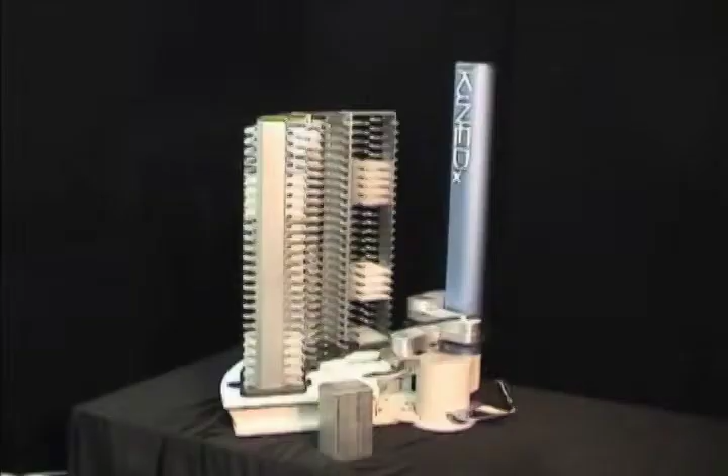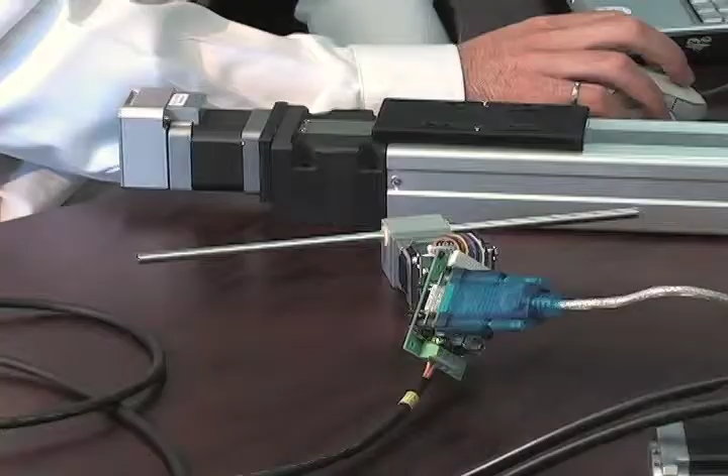What's happening with robotics is we've had a lot of sophisticated theories in the past, but not necessarily the technology to implement them. Now with the advent of faster processors, smaller electronics, better magnets even, we're able to achieve new kinds of motion, new kinds of force, new kinds of coordinated actions that in the past we weren't able to do.

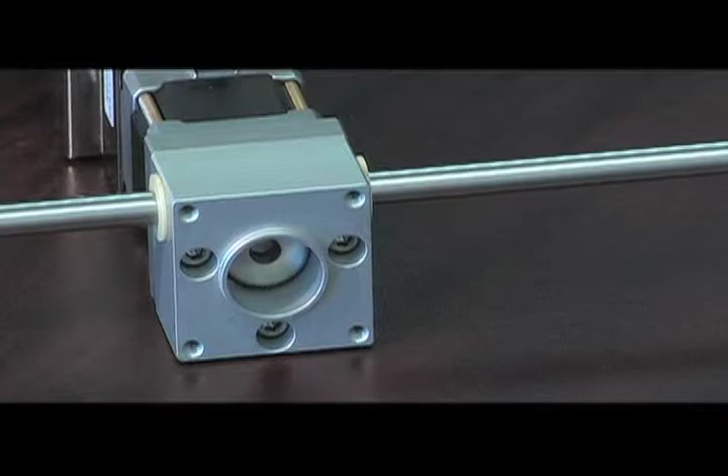So when we talk about advances in robotics, we are talking about being able to move things quicker, more smoothly, more quietly, and also be able to coordinate a bunch of motions together.

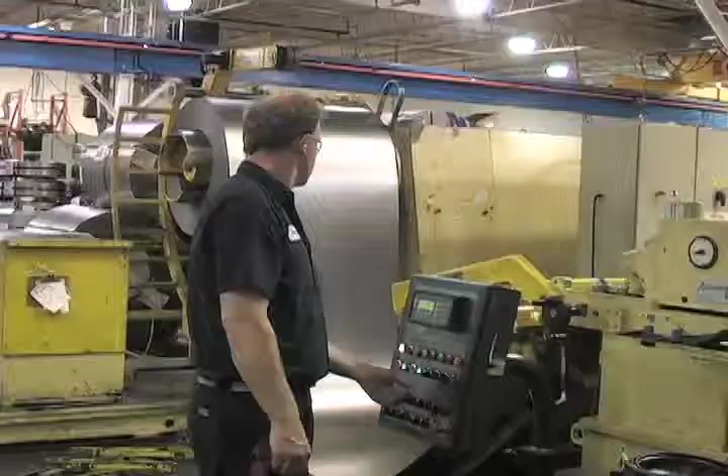Like many new technologies, there are some ethical issues associated with robotics. Some believe they'll take over the world and destroy us all. Others are more concerned that robotics are slowly replacing our workforce, putting people out of jobs.

Chris Murray from Myostat Motion Control talks about how robotics are used in the workplace.

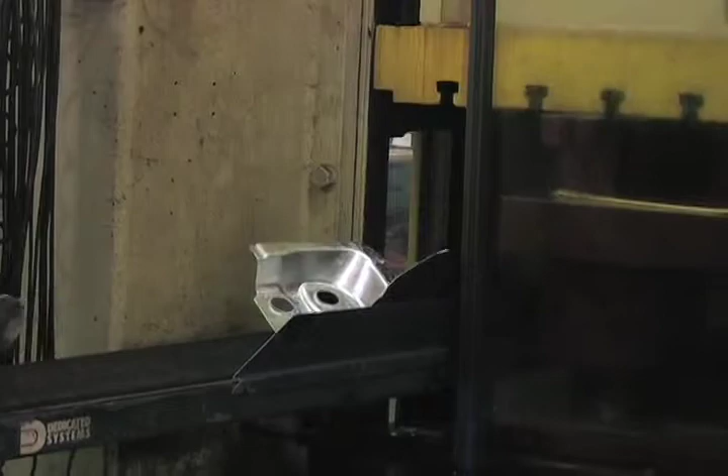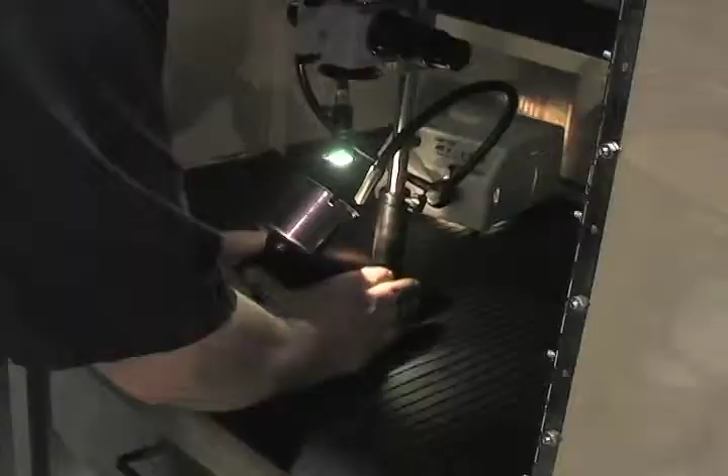The common misconception is that robotics and automation are displacing employees. But really what's happening is automation is allowing people to do things with much finer control, or it's allowing people to do things much more quickly. It's also automating a lot of very redundant, boring things and allowing people to do other more sophisticated jobs while the machine is working.

So we're seeing a shift. Manufacturers are the largest market when it comes to selling robotic devices.

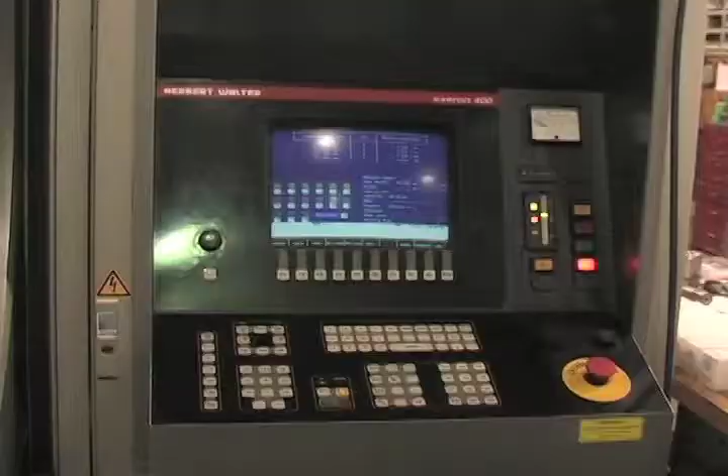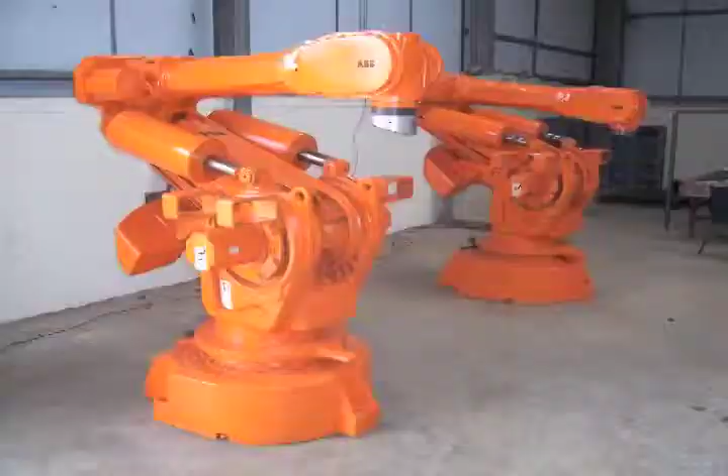With the rising dollar and production on the decline in Ontario, is it a good idea to be entering an industry under pressure? There are a lot of economies out there where their currency is still much more expensive than ours, especially Europe, and Europe's a highly automated organization of countries.

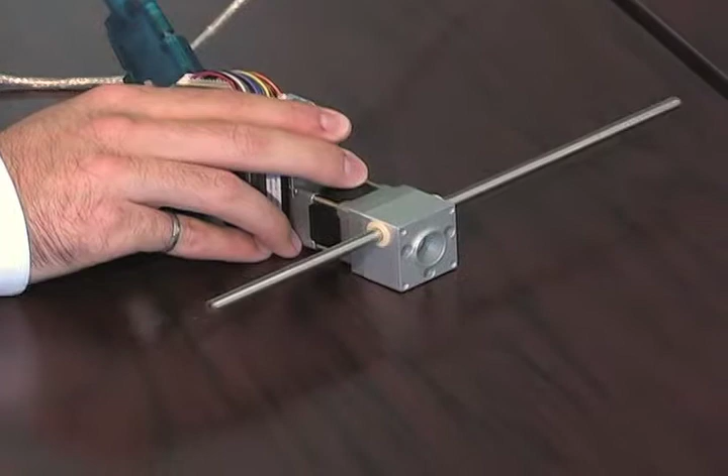So there's a lot of opportunity for Canadians to still make money exporting their intelligence. Automation componentry, automation machines, a large portion of the cost is really intellectual property as opposed to the manufacturing costs and material costs. Building robotics can be a complicated process, with many talents and components involved.

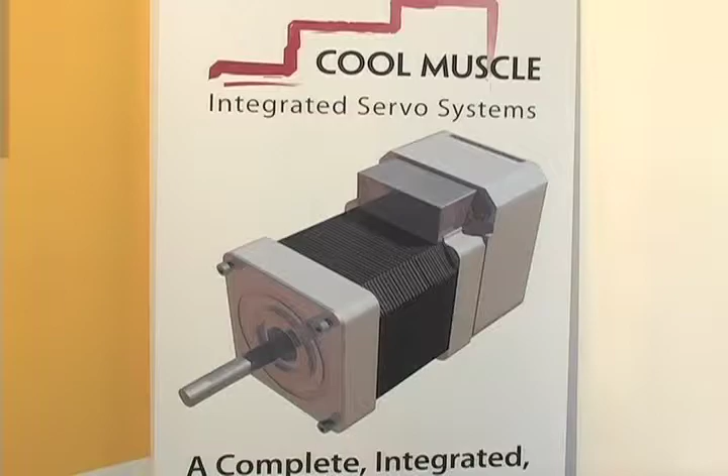This is an industry with many different kinds of experts and plenty of opportunity for resellers and distributors to create added value. The Cool Muscle is a product that we bring in from Japan, and the Japanese had tailored it for their Asian market. So we worked hard and we changed the software and the interface on the motor to tailor it to the North American and European markets.

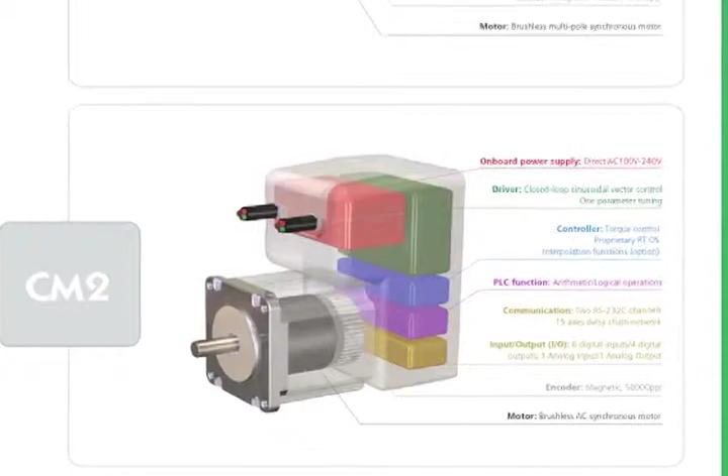What our customers do is they'll then take that technology and integrate it into their machines and add their own concepts and patented technologies and what have you to create more sophisticated products.

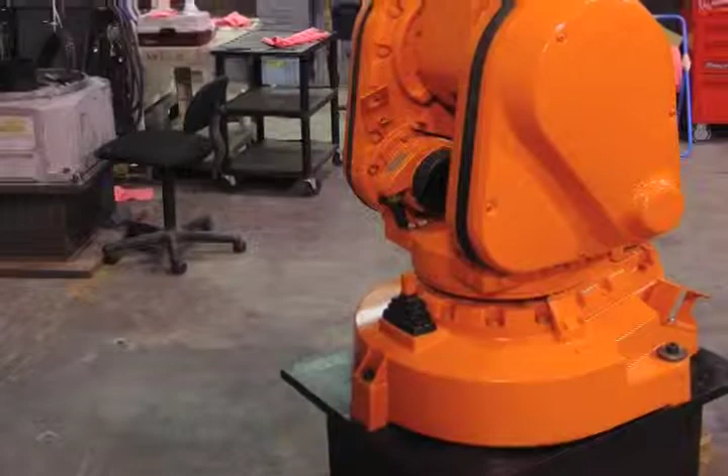The addition of robots to industry is a phenomenon that's occurring worldwide. It may be surprising where some of the biggest customers are.

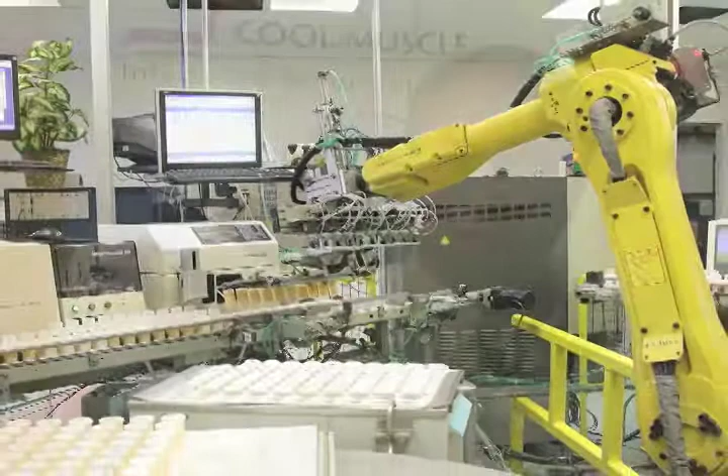The honest to goodness truth is that these companies in China, they need new technology, and they've never done this stuff before. If you talk to somebody in China, they'll tell you we're making it up as we go along.

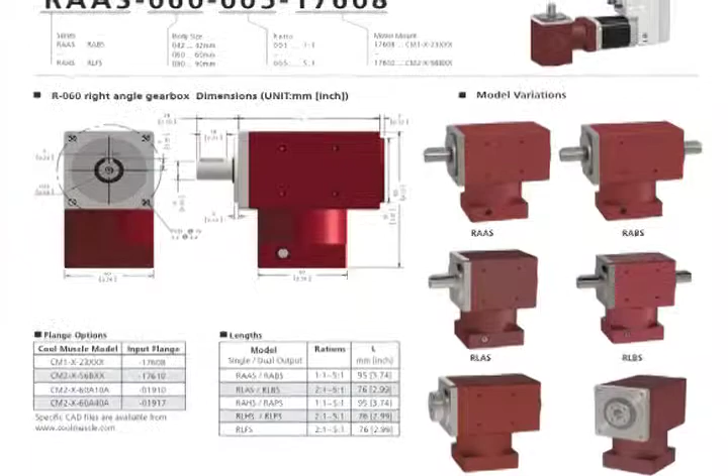What that means is that the Chinese and a lot of other countries in Asia are buying intellectual property. They're buying the sophisticated automation, they're buying the concepts, and then they're working it into their own machines, and then they're selling those machines back to us.

So from a simple economic standpoint, yes, China does a lot of exports, but they also do an incredible amount of imports because they have to bring in the materials to generate that product, the export.

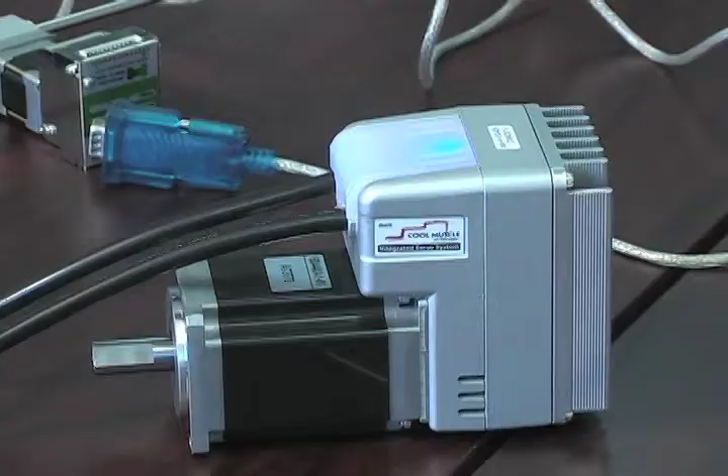Bill Gates recently stated that robotics is at the same stage as computers were when they started Microsoft. If that's true, then we can expect to see large growth for this industry. Things are evolving and changing very quickly.

So when we talk about the future of our company, we talk about the future of automation, we can't be stagnant. There's a lot of new technologies coming out, there are a lot of new concepts being developed, and so there's a Canadian drive towards developing new technologies, and that's going to keep us in the forefront.

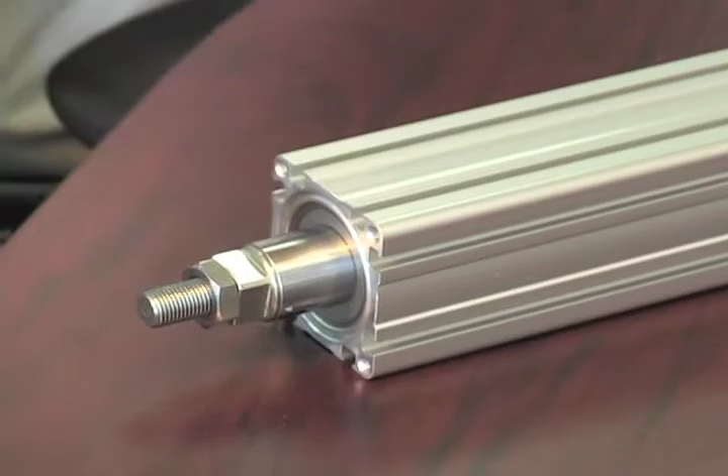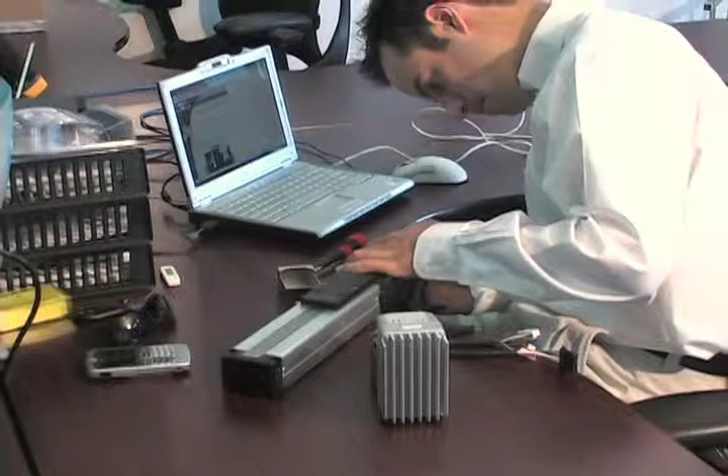As long as we can look to other suppliers outside of Canada, outside of North America, to do quality manufacturing, Canadians and North Americans can put very good concepts and ideas forward and have them built either at home or have them built abroad, depending on where the markets are.